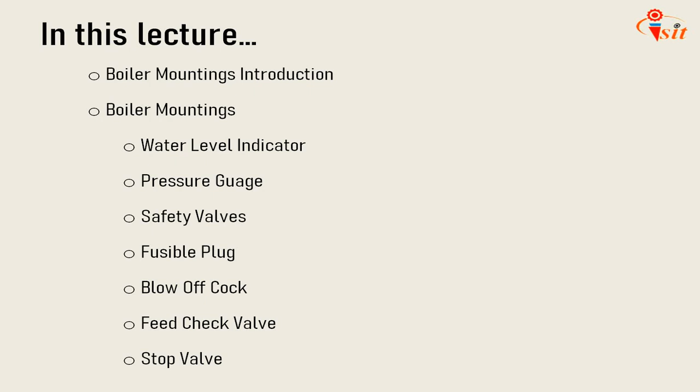Today we will cover the following points: boiler mountings introduction, boiler mountings, and in that water level indicator, pressure gauge, safety valve, fusible plug, blow off cock, feed check valve and stop valve. We will start with the introduction.

In accordance with the Indian Boiler Regulation (IBR), mountings are essential fittings for safe working and control of a boiler. The boiler accessories are those devices which are fitted either inside or outside the boiler to improve the efficiency and performance of a boiler or help in proper working of a boiler plant.

The boiler mountings are the different fittings and devices which are mounted on a boiler shell for proper functioning and safety. These form an integral part of a boiler. These are in two groups. First one is mountings for safety. Under that, safety valves, 2 numbers required. High pressure and low water supply valve on Lancashire and Cornish boiler, 1 number each. Water level indicator, 2 numbers.

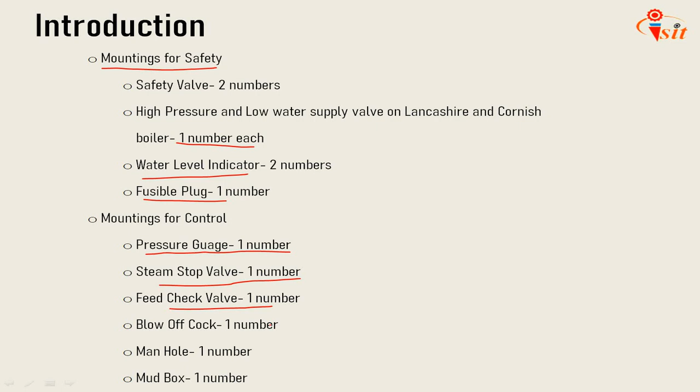Fusible plug, 1 number. The second category is mountings for control. For that, the pressure gauge required is 1. Steam stop valve, 1 number. Feed check valve, 1 number. Blow off cock, 1 number. Manhole, 1 number. Mud box, 1 number. So these quantities of mountings are required for safety and controlling the boiler functioning.

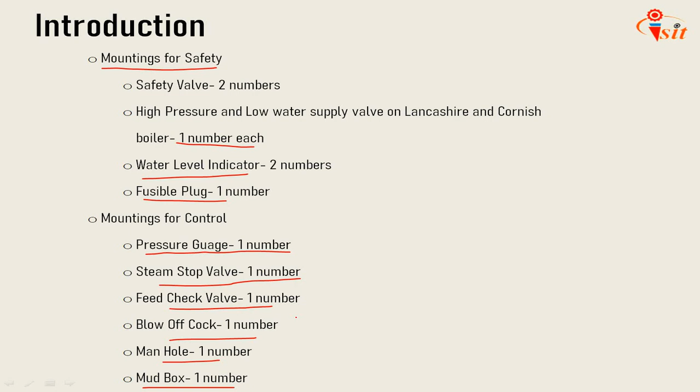So the first boiler mounting is the water level indicator. The function of a water level indicator is to indicate the level of water in the boiler constantly. It is also called water gauge. Normally, 2 level indicators are fitted at the front end of every boiler. Where the boiler drum is situated at a considerable height from the floor, the water gauge is often inclined to make the water level visible from any position.

When the water being heated in the boiler transforms into steam, the level of water in the boiler shell goes on decreasing. For the proper working of the boiler, the water must be kept at safe level. If the water level falls below the safe level and the boiler goes on producing steam without the addition of feed water, great damage like crack and leak can occur to the parts of the boiler which get uncovered from water. This can result in the stoppage of steam generation and boiler operation.

Here the figure shows a Hopkinson's water gauge. It is a common form of glass tube water level gauge. A is the front end plate of the boiler. F is a very hard glass tube indicating water level and is connected to the boiler plate through stuffing boxes in hollow gunmetal castings B and C, having flanges X and Y for bolting to the plate.

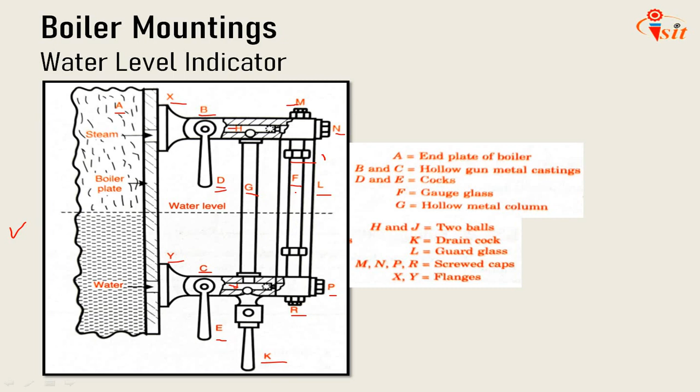M, N, P and R are screwed caps for internal cleaning of the passage after dismantling. L is the guard glass, which normally will hold flying pieces if the tube gives way, so the pieces will not fly and hurt the attendant. So that is about the water level indicator. These are the components of the water level indicator for efficient working of this indicator.

Next mounting is the pressure gauge. The function of a pressure gauge is to measure the pressure exerted inside the vessel. The gauge is usually mounted on the front top of the shell or the drum. It is usually constructed to indicate up to double the maximum working pressure. Its dial is graduated to read pressure in kgf per centimeter square.

There are two types of pressure gauges: Bourdon type pressure gauge and diaphragm type pressure gauge. A pointer which rotates over a circular graduated scale indicates the pressure. A pressure gauge is known as a compound pressure gauge if it is designed in such a fashion so as to measure pressures above and below the atmosphere on the same dial.

Here the figure shows the Bourdon type pressure gauge, single tube, the most widely used pressure gauge. The essential feature of this gauge is the elliptical spring tube, which is made of special quality bronze and is solid drawn. One end A is closed by a plug and the other is connected with a block C.

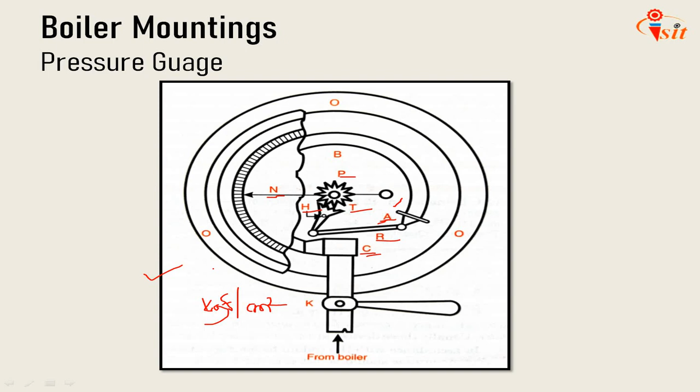Next is safety valves. The function of a safety valve is to release the excess steam when the pressure of steam inside the boiler exceeds the rated pressure. As soon as the pressure of steam inside the boiler exceeds the rated pressure, the safety valve automatically opens and excess steam rushes out into the atmosphere till the pressure drops down to the normal value. A safety valve is generally mounted on the top of the shell. As per boiler regulations, every boiler must be fitted with at least 2 safety valves.

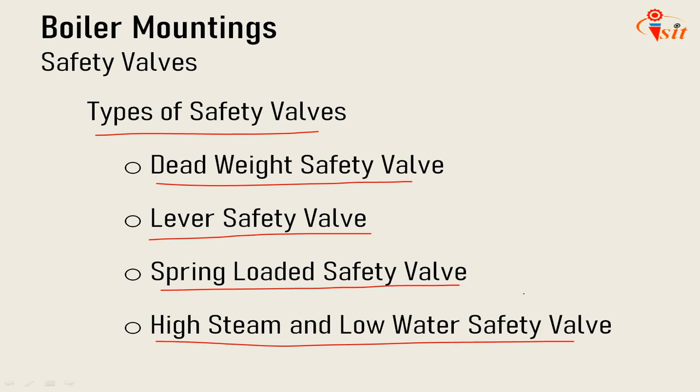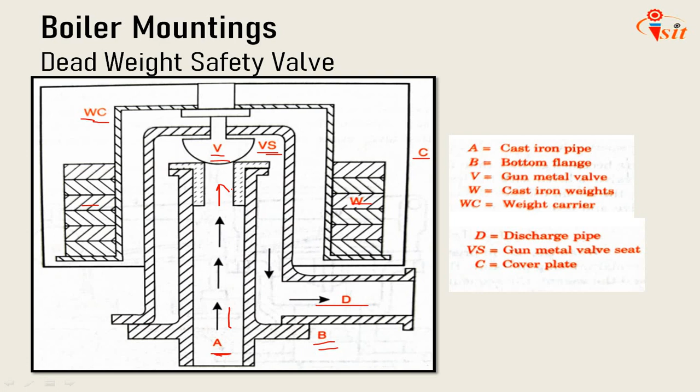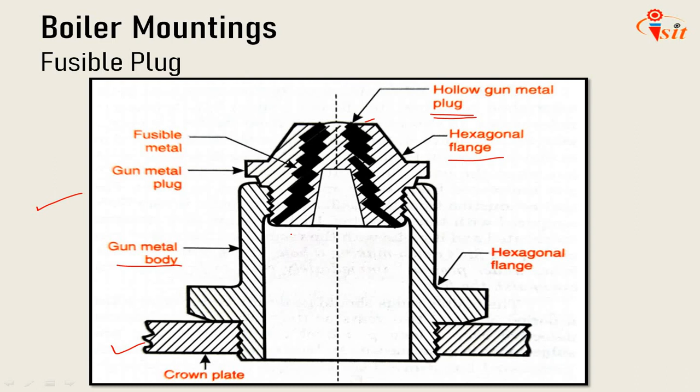Hence, the fusible plug becomes overheated and melts, with the result that the hollow gunmetal plug falls down, making a hole. The steam and water, being under pressure, immediately rush into the firebox and extinguish the fire. Fusible plugs should generally be renewed after a period of about 2 years, as they are liable to become defective over a long period of use.

The next mounting is about the blow-off cock. A blow-off cock or valve performs two functions. It may discharge a portion of water when the boiler is in operation to blow out mud, scale or sediments periodically. Second, it may empty the boiler when necessary for cleaning, inspection and repair.

It is fitted on the boiler shell directly or to a short branch pipe at the lowest part of the water space. When more than one boiler is working and they drain into the same waste pipeline, an isolating valve is necessary to prevent the discharge of one boiler from entering into the other.

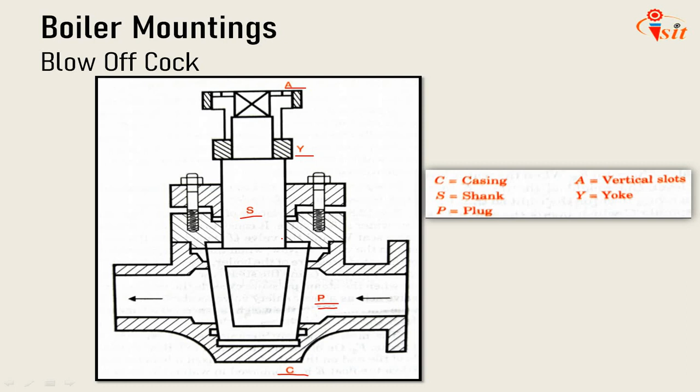So that is the function of the blow-off cock, which empties the boiler when necessary for cleaning, inspection, repair, or blows out the mud, scale or any sediments when it is deposited at the bottom of the boiler.

Next mounting is the feed check valve. The function of the feed check valve is to control the supply of water to the boiler and to prevent the escaping of water from the boiler when the pump pressure is less or the pump is stopped. The feed check valve is fitted in the water space of the boiler slightly below the normal level of the water.

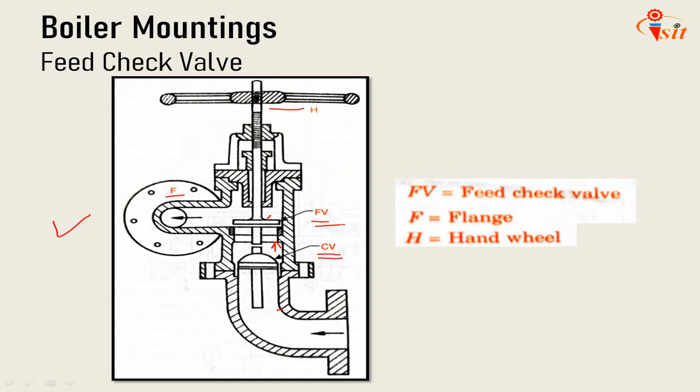Next is the stop valve. It is also called a junction valve. A junction valve is a valve which is placed directly over a boiler and connected to a steam pipe which carries steam to the engine. If a valve is placed in the steam pipe leading steam to the engine and placed near the engine, it is usually termed a stop valve. Junction valve and stop valve are essentially the same. The larger sizes are called junction valves and the smaller sizes are called stop valves.

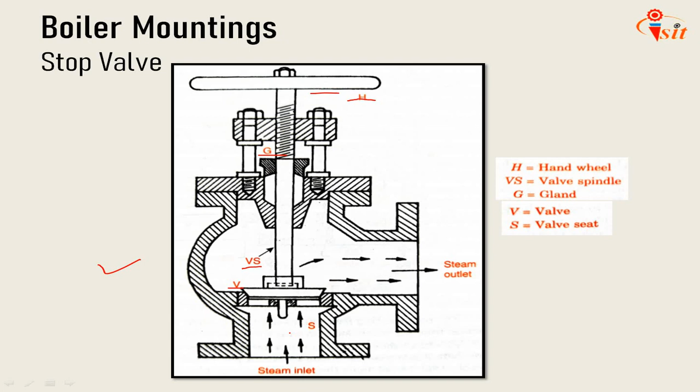Okay, so these are the mountings which we have discussed here.